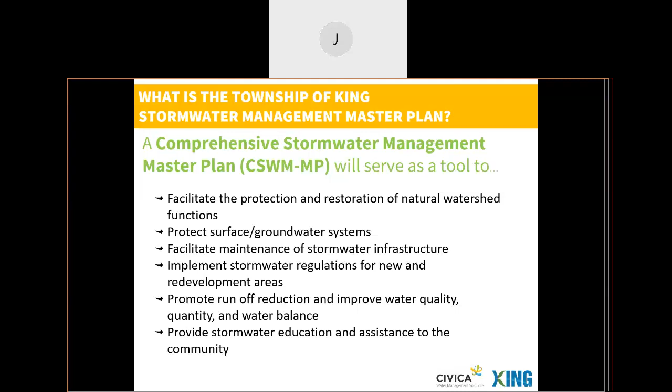PIC number 1 was held virtually on November 27, 2020. Here we discussed in detail what the Stormwater Master Plan is and what the objectives are. We discussed how this comprehensive master plan meets the requirements set out for master plans based on the municipal class environmental assessment process. And we had a summary of the existing infrastructure within the township and what issues currently exist. So after review of the master plan process and the existing conditions in the township, the problem and opportunity statement for the master plan was presented.

And finally, once the problem and opportunity statement was presented, a discussion was held to present the alternative solutions for addressing the stormwater problems within the township. So today's discussion will follow up on that and will focus on our preferred solution and the planning process for implementation and maintenance of this solution.

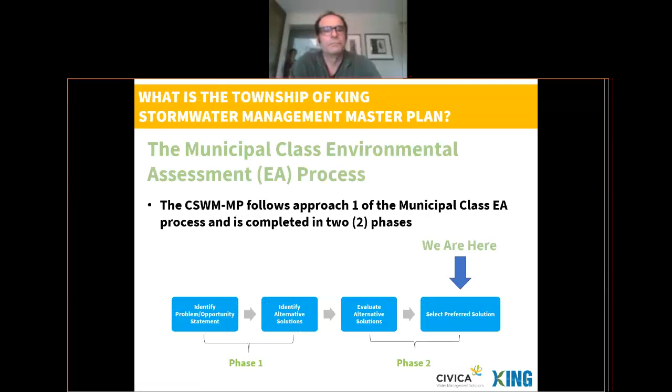And so typically master plans are developed using the municipal class environmental assessment process. This process studies and identifies the potential positive and negative effects of improvement to infrastructure, in our case, stormwater infrastructure, as well as the extensive evaluation of the impacts to the natural and social environment.

The planning process is completed in 2 phases, where phase 1 was presented at PIC number 1, and the problem and opportunity statement was presented. Now in the final stages of phase 2, stormwater modeling programs have been used to analyze the results of each alternative solution. So now we're ready to present the preferred solution for implementing and receive feedback from residents and stakeholders.

And so before discussing our preferred solution, we'll just quickly reflect on the existing stormwater infrastructure and their conditions in the township. So currently, stormwater runoff in the township is controlled using traditional practices such as stormwater ponds, culverts, roadside drainage ditches, and storm sewers. The township currently owns and operates 28 stormwater management ponds, 350 kilometers of ditches, 100 kilometers of storm sewers, and 1,500 culverts. Review and inspection of these assets show buildup of sediment, which results in some areas being prone to flooding, which must be addressed.

As development occurs, there will be a significant increase in the impervious surfaces around the township. This will result in an increase in the amount of stormwater runoff, which will cause further strain on the existing infrastructure. Our preferred solution will be implemented to relieve this existing infrastructure and guide the implementation of new infrastructure.

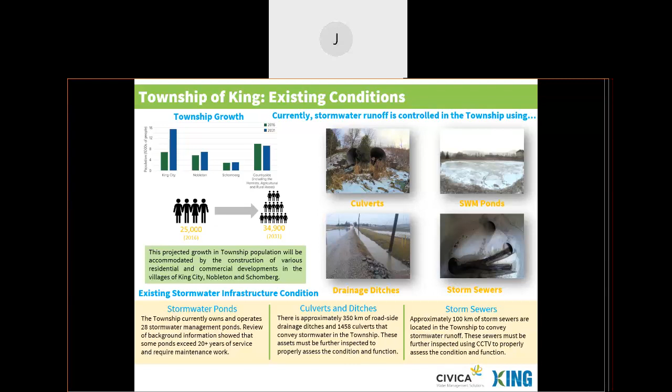So the alternatives that have been reviewed to address the stormwater impacts are traditional SWM, or the do-nothing approach, which would maintain the status quo of traditional stormwater management measures and would see an update to stormwater infrastructure policy. And so the second alternative would be low impact development measures.

And these are systems which are used to mimic natural hydrologic processes for stormwater runoff. And they promote infiltration and evapotranspiration for the stormwater runoff. Some of these examples are your grass swales or permeable pavements, which help control the stormwater runoff. And then our final alternative was the combination of both traditional and LID measures.

So using the stormwater modeling techniques, each alternative was modeled to reflect the efficiency of the alternative at meeting design targets under simulated rainfall events. Then once we see these results, these solutions are evaluated based on feasibility, so whether the application of the proposed solution is practical and affordable. We look at constructability of our preferred solution. How easy or realistic is it to construct?

We look at our environmental impacts. What are the potential impacts to the environment, of course? And then we will be looking at the benefits to residents. So will the solutions help solve the SWM issues in the township?

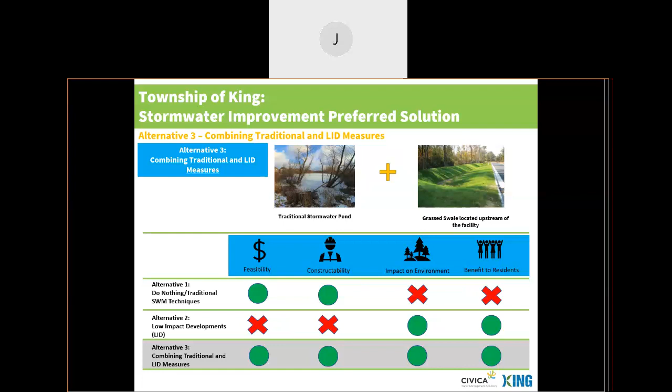So in addition to addressing the stormwater management goals, LIDs can also be integrated into the built environment and provide more opportunities for open space and development when combined with traditional SWM techniques. So we find it creates a balanced approach that is more feasible, constructible, and has the least impact on the environment and the highest benefit to residents, following alternative number three.

So after determining a preferred solution, we want to circle back and ask ourselves, why are we creating this master plan? What are the goals of our stormwater master plan? And does our plan successfully achieve these goals? So Ontario is constantly growing and adapting to growth plans for communities. As part of the township's official plan to meet provincial growth rates, there is, of course, planned development across the township.

And we know that this development will increase our stormwater runoff, and we have to make a plan to mitigate the effects of this on both the natural and built environment within the township. While doing this, we also have to keep in consideration our economic and sustainability goals to guarantee long-term success when implementing. So these factors that we have to consider are increased flooding, increased pollution, increased stream erosion, and reduced groundwater recharge. So we'll get into the discussion now on how our preferred solution will address these concerns.

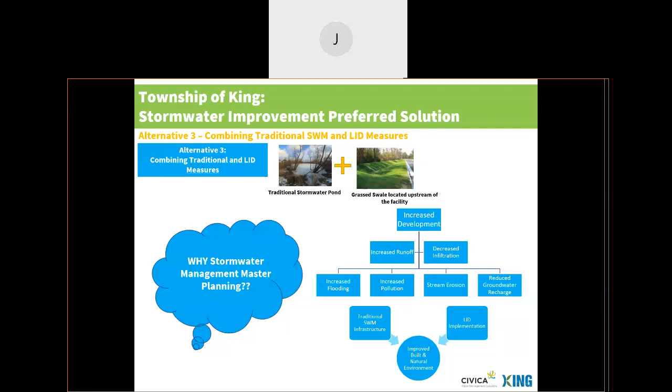So erosion control is required for protecting natural channels from degradation caused by high flows from surface runoff. Many of the existing facilities in the township are not currently meeting these erosion control requirements, and implementing LIDs in combination with these will really help decrease the peak flows going to channels. It becomes useful to implement these LIDs especially in scenarios where there is not enough space or other issues preventing the upgrade of existing stormwater facilities in the township.

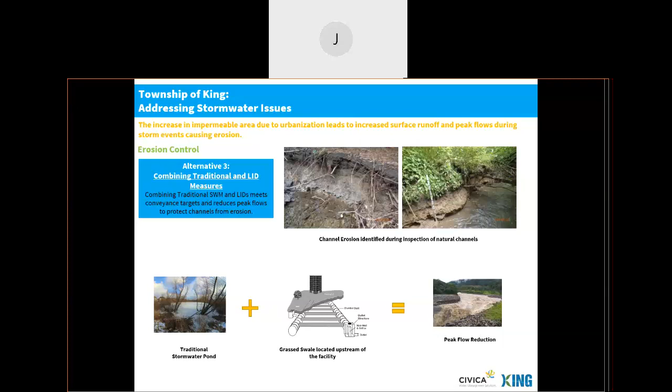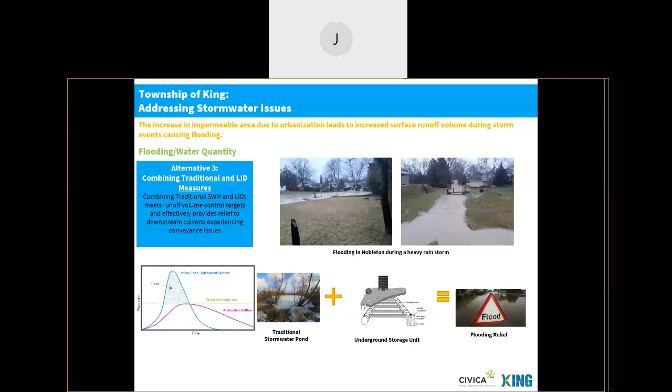So looking at flooding, our traditional SWM facilities typically take up large areas of land to store stormwater runoff and provide flooding relief. When these facilities fill with sediment, the storage intended for stormwater is no longer available, and it causes flooding issues to the surrounding environment. So with the anticipated increase of runoff from future development, even when the maximum storage capacity is available, these existing facilities will not be sufficient for providing the flood relief required. Finding LID opportunities in combination with traditional SWM facilities assists in addressing flooding issues by providing more available stormwater storage throughout the township.

And so for pollution and water quality, our traditional SWM facilities are effective at treating pollution and stormwater runoff, but become very costly when it comes time to clean out. So LIDs are also very effective in phosphorus and runoff treatment for pollution. They utilize filtration and planting systems to abstract the phosphorus and sediment from stormwater. These LIDs would receive regular maintenance, which can't typically be done in a stormwater facility on a regular basis. So these LIDs would provide relief to the existing facilities and would increase the level of water quality treatment that's actually happening before stormwater returns back to our channels.

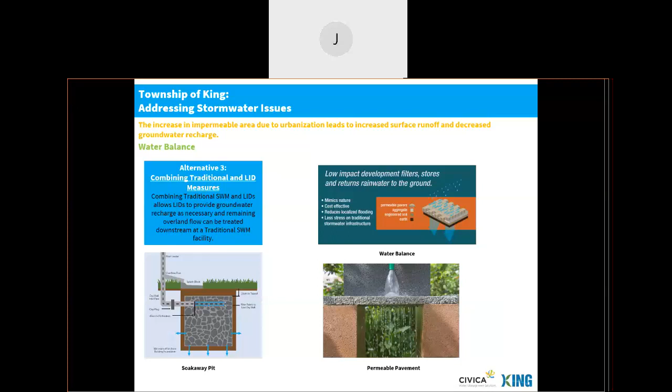And so for water balance, we're looking at recharging our available groundwater. Traditional SWM facilities don't typically provide water balance in this case for returning stormwater to the ground. So we would combine our traditional SWM and LIDs, and the LIDs would provide further groundwater recharge as available upstream of any traditional facilities. So this would also provide relief to those facilities by decreasing the volume and pollutants entering the facilities.

And so, in order to effectively protect the natural and built environment, criteria must be set out to efficiently implement the preferred solution of combining traditional SWM facilities and LIDs. Separate criteria requirements will be met for both on-site controls at future developments and end-of-pipe SWM facilities on public property. So for future developments, when it comes to water quantity, all future developments will be required to implement LIDs and SWM facilities to provide on-site storage to control post-development flows to pre-development flows, which would basically prevent any increase of volume of stormwater runoff in the township. This would be addressed on-site and prior to leaving a development.

And so for erosion control on future developments, they will provide additional storage to retain 5 millimeters of rainfall over the entire site. This will help prevent high flows from causing erosion downstream. So then our developments must pre-treat runoff before releasing it to municipal infrastructure. The MOE has guidelines which state that 80% of total suspended solids must be removed from runoff. Phosphorus loadings must also meet the pre-development conditions to prevent increased phosphorus loadings entering the lakes and rivers in the township. And finally, future developments will be responsible for maintaining water balance to pre-development infiltration volumes. This will basically protect the groundwater recharge at these development sites.

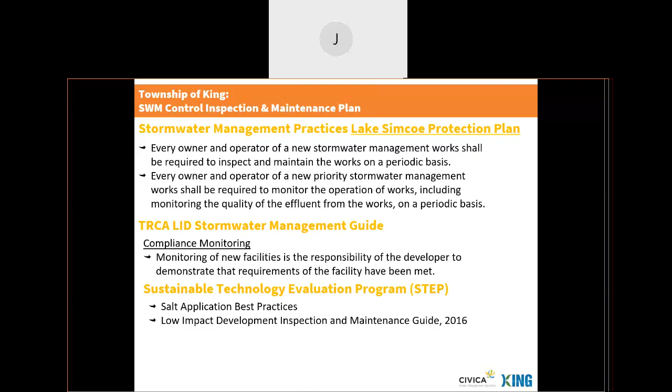So the stormwater management maintenance plan will focus on and consider implementing inspection requirements for private developments and enforcing the maintenance requirements for private developments. It will summarize these maintenance requirements for all stormwater infrastructure that would be implemented. And then we would verify maintenance and operation is sustained through enforced inspection reporting programs and annual progress reports on the status of achieving the preferred solution. So as new measures are implemented, they would be tracked, and that would guide us on our status of meeting our goals.